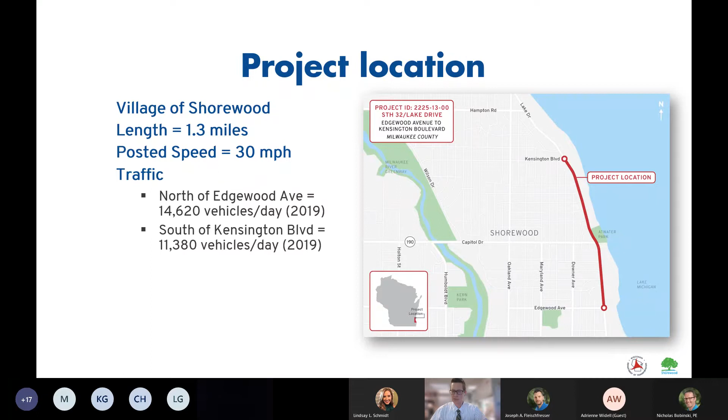Looking at the project, it's located on Lake Drive in the village of Shorewood. The limits are Edgewood Avenue on the south end, and that extends north to Kensington Boulevard for approximately 1.3 miles. The posted speed limit is 30 miles an hour, and traffic in the corridor north of Edgewood is approximately 14,600 vehicles a day, and south of Kensington, it's just over 11,000 vehicles a day.

The purpose and need for the project is to address failing pavement condition. The original pavement was installed in 1952, as well as upgrading existing municipal underground facilities. At this stage, we also need to consider bike and pedestrian accommodations.

So the proposed improvements include pavement construction. This means we are removing the existing pavement as well as the base below it, replacing curb and gutter, and improving curb ramps - this is where the sidewalk meets the curb and gutter at side road intersections. We need to make sure that's ADA compliant, and we'll be replacing combined sewer and water main in the project corridor for the village of Shorewood.

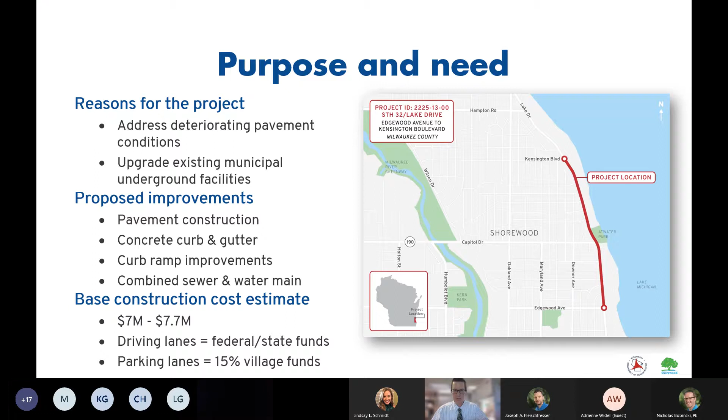Looking at the base construction cost estimate, this would be for replacing the project within its current footprint and not expanding the roadway. The base construction cost estimate is a range of $7 million to $7.7 million. Of that, the driving lanes are funded by federal and state funds, 80% federal funds and 20% state funds. And the parking lanes, though, the cost share for that would be 80% federal funds, 5% state funds, and 15% Village of Shorewood funds. So there's only one alternative that affects the village's cost share, and I'll point that out when we discuss the alternatives and the options in more detail.

Before we look at the proposed alternatives, this corridor is State Highway 32. So there are standards that apply for bicycle and pedestrian accommodations, as well as driving lane and parking lane widths. We will be following the Wisconsin Department of Transportation's Facilities Development Manual, which has desirable and minimum standards for roadways, and you'll see alternatives developed for both.

We are required to show bicycle accommodations. Some of these alternatives do affect on-street parking and existing terrace trees, which are located in the green space between the back of curb and the front of sidewalk.

Although there is a risk to these existing trees with all construction alternatives, the village arborist believes that widening the roadway will have a significant negative impact on these existing terrace trees because their roots likely extend to the back curb. On other Village of Shorewood projects where curbs have been moved out, the arborist has seen that some trees decline quickly, while others may slowly decline over a period of 5 to 10 years.

As a designer, we may deviate from the desirable standards with strong public input, as well as consideration to impacts such as trees, parking, and parkland. We have Atwater Park located in the project, and historic districts—there are 2 residential historic districts within the project limits. So in summary, we need to balance the federal and state standards with the needs of the local community and residents. And like Lindsay said, we're here to get your input.

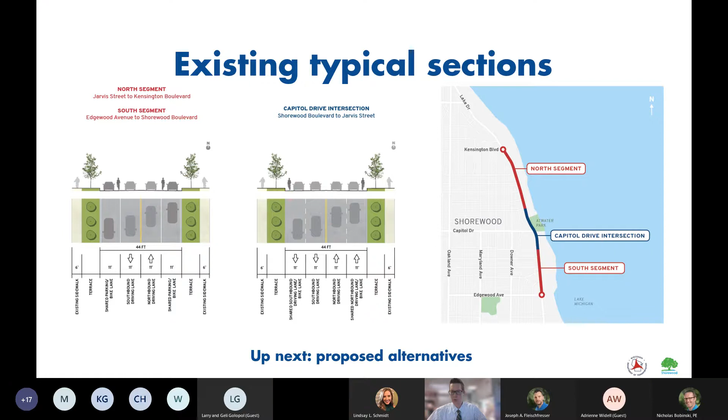We'll begin with the north and south segments. The south segment goes from Edgewood Avenue up to Shorewood Boulevard, and the north segment from Jarvis Street up to Kensington Boulevard. There are 3 alternatives for these segments.

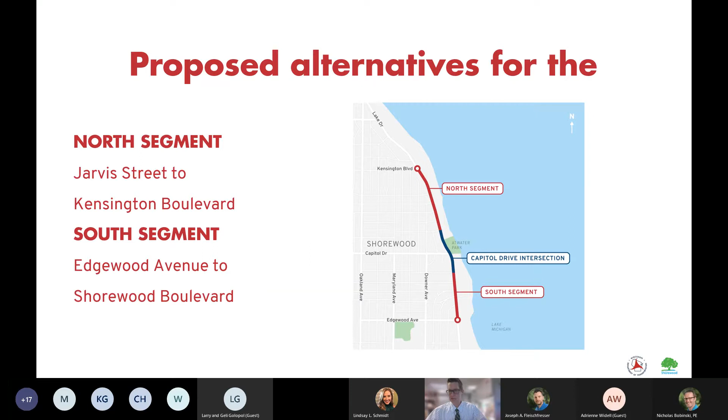The first alternative I want to discuss is called the 5-foot bike lane. This alternative measures 44 feet from face of curb to face of curb, just like the existing roadway. There would be one 11-foot driving lane going northbound and one 11-foot driving lane going southbound. In addition to a 2-foot gutter, there would be a 5-foot dedicated bike lane in each direction, southbound as well as northbound. Under this alternative, there's an 8-foot parking lane.

The alternative on the screen shows the parking lane on the east side of the roadway, because Atwater Park is located on the east side. This could possibly reduce mid-block crossings of people trying to get to Atwater Park. The other benefit is that with parking restrictions in the PM hours, when northbound vehicles are trying to make a left turn onto the side roads, through vehicles could pass those turning vehicles using the parking lane during those restrictions.

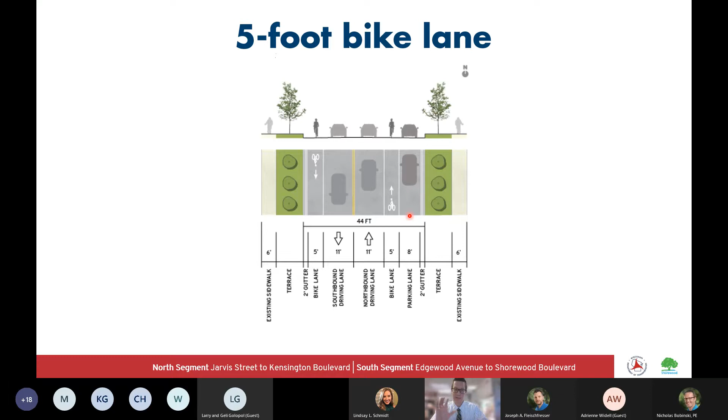That said, the parking lane could also be placed on the west side of the roadway instead of the east side, which would just rotate this alternative 180 degrees.

For the specifics of the 5-foot bike lane alternative: the road width is 44 feet from face of curb to face of curb. There is no widening with this alternative, however there is only one side of parking. There are dedicated 5-foot bike lanes in each direction. This is considered a desirable bike accommodation per WisDOT.

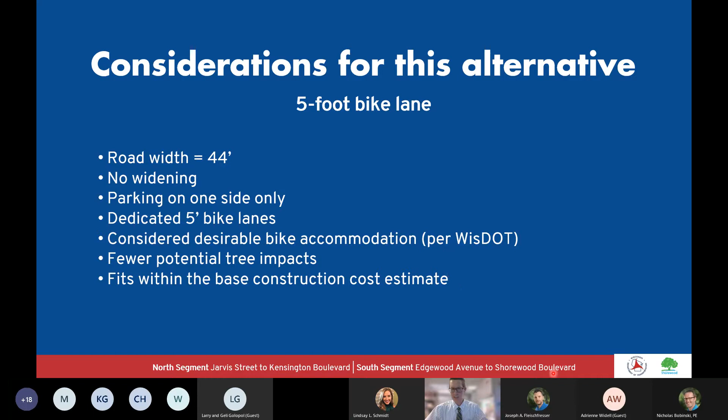Looking back at the standards we started with, this is considered desirable. Since we're not widening, there would be fewer potential tree impacts, and this fits within the base construction cost estimate I mentioned earlier of $7 to $7.7 million. So this is the 5-foot bike lane alternative for the north and south segments.

Moving on to the 12-foot shared parking bike lane alternative. This typical section measures 46 feet from face of curb to face of curb, with one 11-foot driving lane going northbound and one 11-foot driving lane going southbound. In this scenario, the outside lane is widened 1 foot, becoming 12 feet for a shared parking and bike lane on both sides of the roadway.

Looking at the considerations of the 12-foot shared parking bike lane alternative, the road width is 46 feet. This is widening of about 1 foot on each side of the roadway. It does allow parking to remain on the east and west sides of the roadway. Bikes would share a 12-foot parking lane. This is considered the minimum for parking and bikes in a constrained environment.

This is when we have parks such as Atwater Park as well as historic resources in the corridor. However, with the widening of 1 foot on each side, there would be potential greater impacts to those existing trees. And with the widening of the parking lane, the added cost for that would be approximately $130,000 to $190,000 in addition to the base construction cost estimate. Because this widening is happening in the parking lane, this is the one alternative that affects the village's cost share and would increase their participation in 15% of these costs. So this is the 12-foot shared parking bike lane alternative.

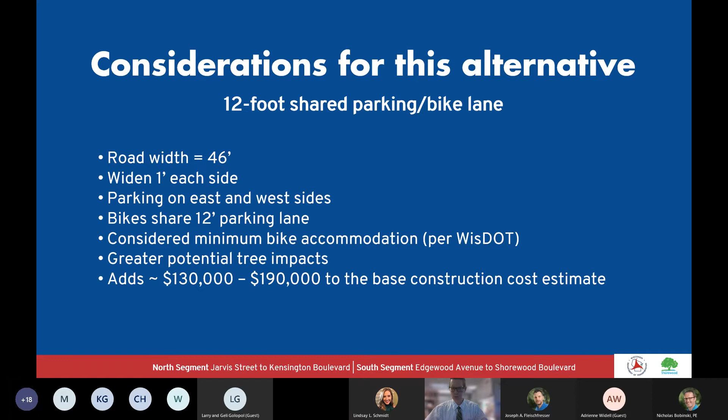Moving on to the replace in kind alternative, this is if we just pull out the pavement and put it back exactly the way it is. This measures 44 feet from face of curb to face of curb. There's one 11-foot driving lane going northbound, one 11-foot driving lane going southbound. The outside lanes are 11 feet wide, and that's for parking and bike use as it is today.

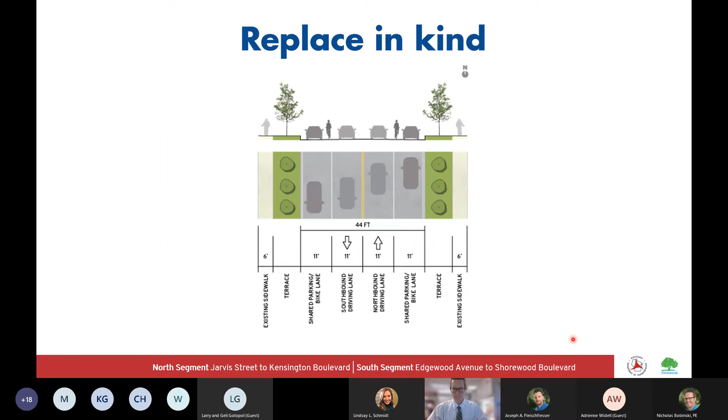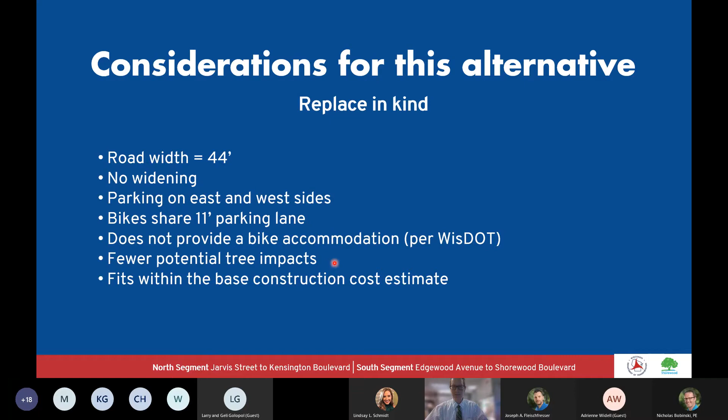Looking at the specifics of the replace in kind alternative, 44 feet from face of curb to face of curb. No widening, parking would be on the east and west sides. Bikes do share the 11-foot parking lane. This does not provide a bike accommodation per WisDOT. However, there would be fewer potential tree impacts because we're not widening, and this does fit within the base construction cost estimate that we mentioned earlier.

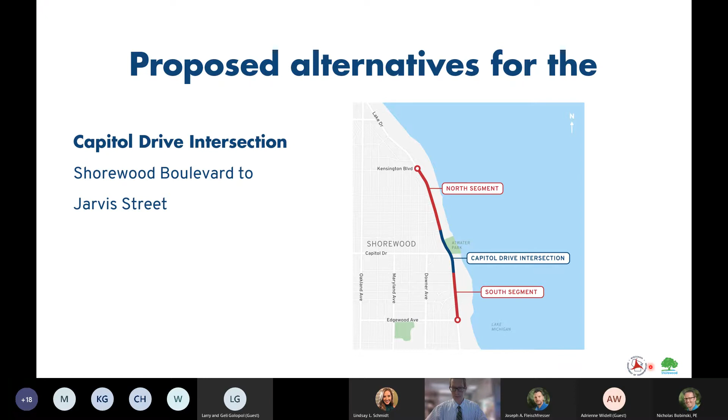Moving on to the Capitol Drive intersection and those alternatives, from Shorewood Boulevard to approximately Jarvis Street. We have 4 alternatives for this segment of the roadway. We'll start with a 5-foot bike lane alternative. This section measures 58 feet from face of curb to face of curb. There would be 2 11-foot driving lanes going northbound and 2 11-foot driving lanes going southbound. The outside lanes would have a 2-foot gutter and a dedicated 5-foot bike lane for southbound as well as northbound.

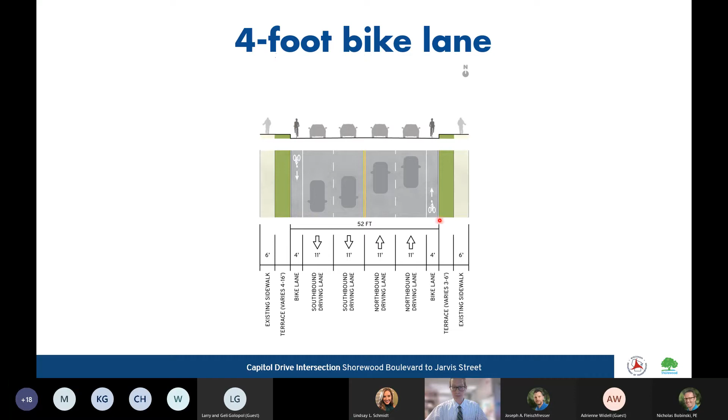Looking at the specifics of the 4-foot bike lane at Capitol, road width would be 52 feet. That's widening of about 4 feet on each side of the roadway. The width of the outside driving lane is 11 feet, which meets standards. It has dedicated 4-foot bike lanes, which is considered a bike accommodation per WisDOT. However, there's going to be impacts to trees as well as traffic signals, and this adds approximately $290,000 to $350,000 to the base construction cost estimate. Again, these are estimated numbers for comparison.

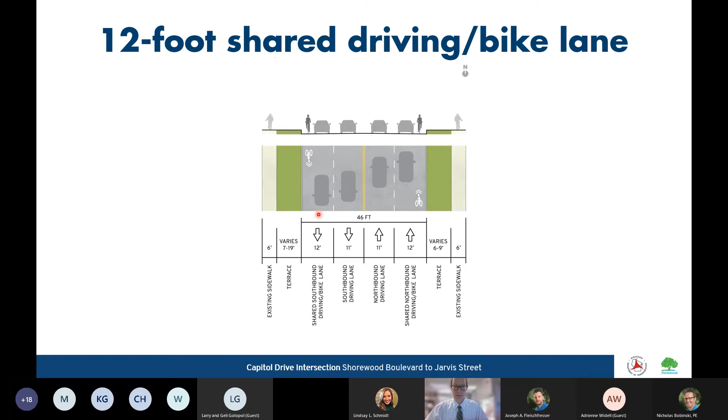Next alternative would be the 12-foot shared driving bike lane alternative. This is at Capitol Drive, measuring 46 feet from face of curb to face of curb. There's one 11-foot driving lane going northbound and one 11-foot driving lane going southbound. There's also a 12-foot shared lane for bikes and vehicles going northbound, and similarly a shared 12-foot driving bike lane going southbound.

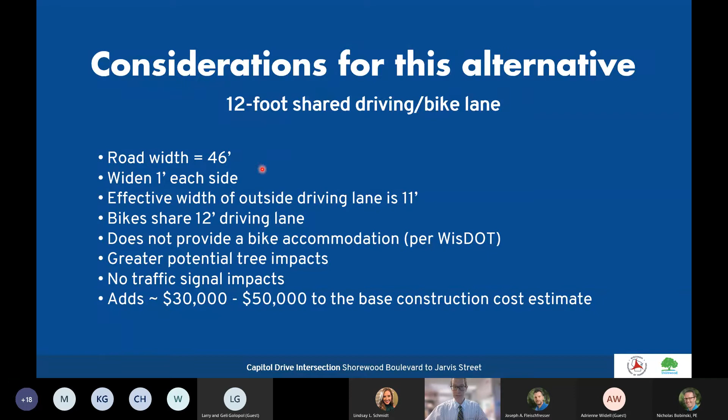Looking at the specifics of the 12-foot shared driving bike lane alternative, the road width is 46 feet, about 1 foot of widening on each side. The effective width of the outside driving lane is 11 feet. WisDOT has seen that when the curb is right there on the lane, vehicles tend to stay at least 1 foot off of it, effectively reducing that outside driving lane width to 11 feet, which still meets the standards for the driving lane.

So bikes do share this 12-foot area, however it does not provide a bike accommodation per WisDOT. With the widening, there are greater potential tree impacts; however, there would be no traffic signal impacts. This would add about $30,000 to $50,000 to the base construction cost estimate. Again, this is the 12-foot shared driving bike lane at the Capitol Drive intersection.

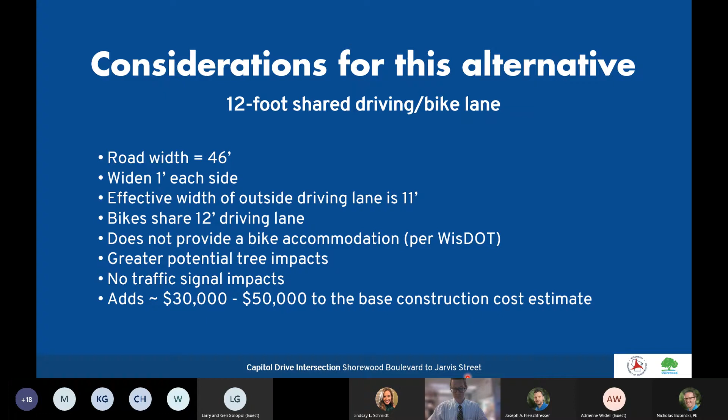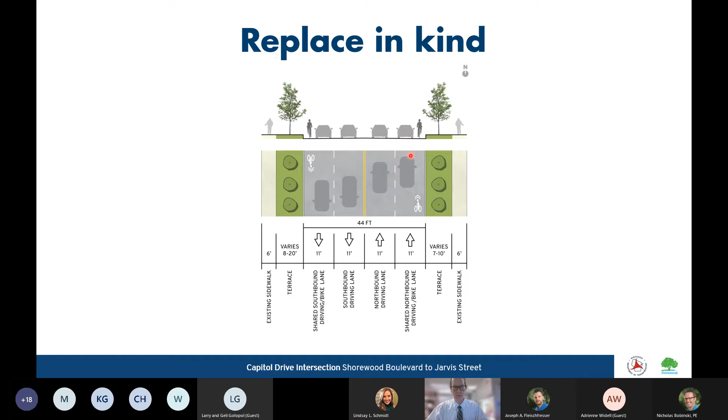Finally, we have the replace in kind alternative — if we take out what's there and put it back exactly the way it is. This measures 44 feet from face of curb to face of curb, with one 11-foot driving lane going northbound and one 11-foot driving lane going southbound. Just like today, there's an 11-foot shared lane on the outside that bicycles need to share with traffic, one lane northbound and the same thing southbound.

Looking at the specifics of this alternative, the replace in kind at Capitol: road width is 44 feet, with no widening. However, the effective width of the outside driving lane would only be 10 feet, which does not meet the WisDOT standard. Bikes would be sharing an 11-foot driving lane, which does not provide a bike accommodation. It fits within the existing footprint, so there would be fewer potential tree impacts, no traffic signal impacts, and it fits within the base construction cost estimate we discussed earlier.

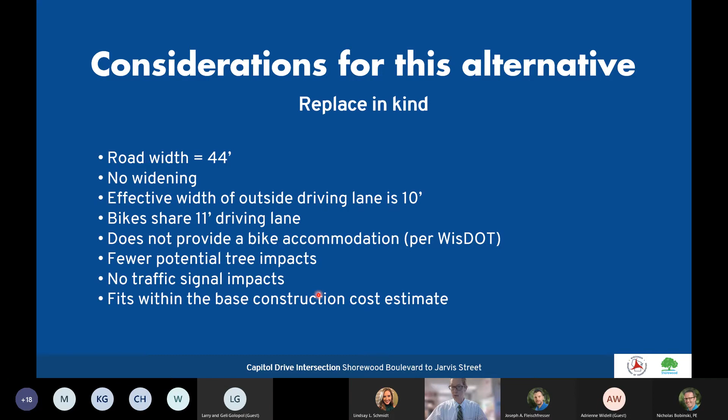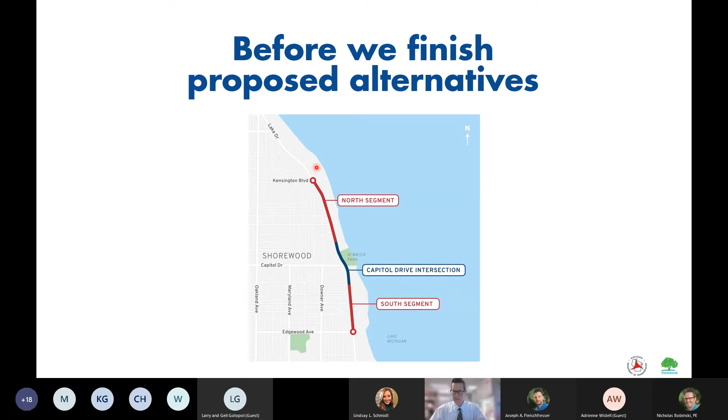Before finishing, I want you to know we can mix and match these alternatives. For example, if it's determined that the appropriate alternative for the south segment is the 5-foot bike lane, that doesn't mean it's an appropriate alternative for the Capitol Drive segment or the north segment. So these alternatives can be combined or blended to complete the full corridor. We'll also be coordinating with the City of Milwaukee on the south end of the project and the Village of Whitefish Bay on the north end to transition our pavement marking with projects in the neighboring communities.

Most of the existing sidewalk will remain in place. However, there will be some minor sidewalk replacements at curb ramps — locations where the sidewalk meets the existing curb and gutter at intersections. These curb ramps would be replaced to make sure they're ADA compliant.

With the sewer and water work, there may need to be connections to laterals to the individual properties. If that's the case, there may need to be some spot locations where sidewalk would be replaced for the lateral work. And with the widening alternatives, there could be some sidewalk that needs to be replaced. In this case, we're showing that at Atwater Park, where the roadway is expanded really close to the existing sidewalk.

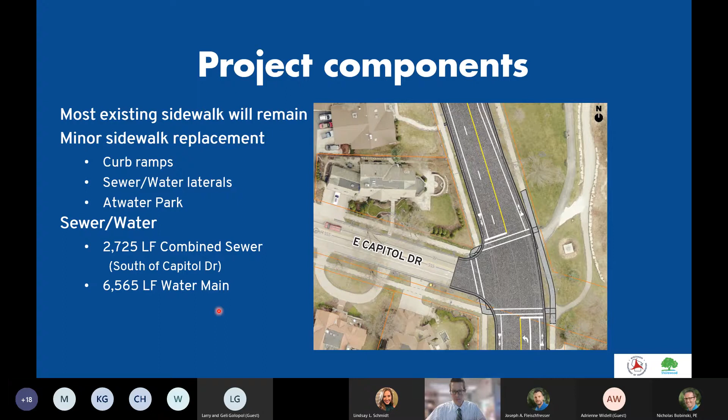As far as the sewer and water goes, there's about 2,700 lineal feet of combined sewer that would be installed south of Capitol Drive, and 6,600 feet of water main throughout the project corridor that will be replaced.

In addition, the village will replace the lighting. Whether the street lighting is impacted by widening or not, the village would like to install new wire in conduit, new poles with LED luminaires to be more efficient.

As far as right-of-way goes, there's no relocations on the project. However, there could be some small strip takings or grading easements required for the sidewalk and curb ramp work that we just discussed on the previous slide.

Other considerations that the village would like the project team to look at would be curb bump outs at intersections to shorten crossing distances for pedestrians, which also serve as a traffic calming option. And then ADA on-street parking, likely near Atwater Park. These will be options that the project team will review as the design progresses.

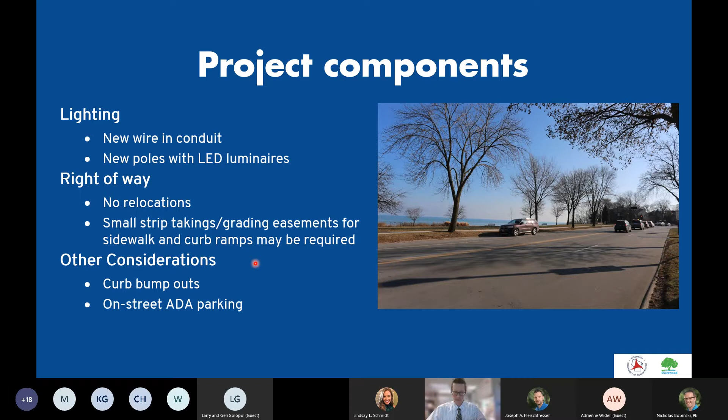We'll upload a recording of this meeting presentation, both the 5 o'clock and 6 o'clock versions, which will be the same. We'll also post a PDF of this PowerPoint, a PDF of the typical sections for the north, south, and Capitol Drive segments, and a PDF showing the different plan view layouts. This will allow residents to find their property and zoom in to see the various layouts, like flying a helicopter over and looking down on the corridor. That'll be very helpful.

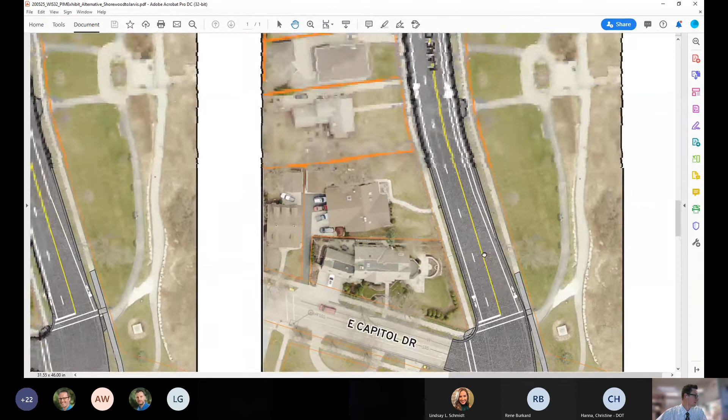Okay, so this is Shorewood to Jarvis. So if we look at the 5-foot bike lane, for example, and zoom in here, that second northbound lane does end just north of the intersection like it is today.

So there is one lane there and two lanes southbound. So this would mean there is no more parking, this would be a dedicated bike lane. Well, this is one of the alternatives, so that's why we shared the link to the website which has these alternatives. The one we just looked at was the 5-foot bike lane, and then there are other alternatives that do allow parking there.

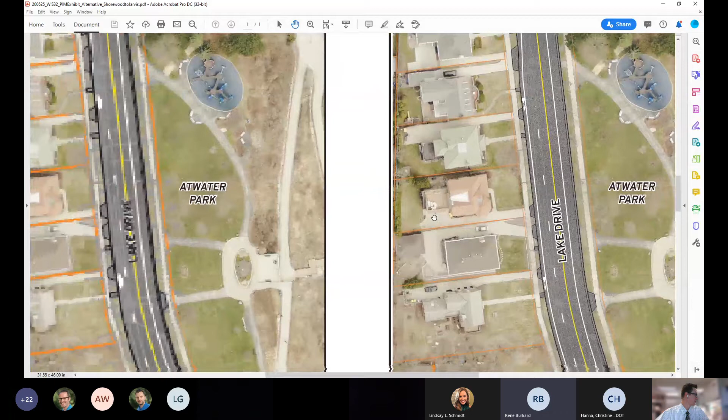Aaron, can I suggest we schedule a call with Renee, or a visit to his property, just so we can give everyone else an opportunity. We have, I think, 5 or 6 other hands up, just for the sake of time.

Yeah, that would be a nice thing, because my neighbors and I inquired for years to do something about the parking situation, because we can't get out of our driveways. There is a lot of parking, and driveways are getting blocked by cars coming from outside. It is a known danger that the village of Shorewood should know. If somebody is getting hit in this area trying to leave their driveway, this is very, very dangerous. That is a known danger.

So Renee, if you can send an email to Aaron, myself, and Lindsay, whoever else you want to copy, with your name and full address, we'll try to schedule a time to meet with you and discuss your concerns further. That will be great. Okay, who should I send the email to again? You can send it to Aaron or myself.

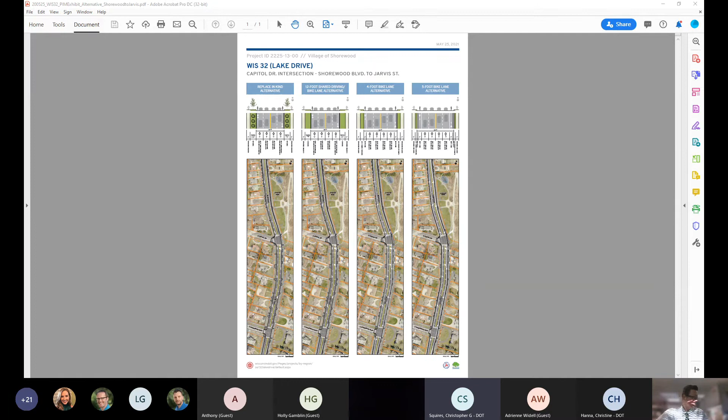There are some alternatives that were presented that can accommodate bikes without widening. So I guess I would encourage everyone, when you submit your comments about what your preferred alternative is, to be as specific as you can as to why you prefer an alternative or what impacts your concerns. For example, if one alternative has parking on one side as opposed to both, if you can provide comments on why you prefer one alternative or replace in kind over the other, I think the more detail the better when it comes to that.

It would help Christine's team. Chris, sorry to interrupt you, but what I've heard from a lot of people, including the village, is that they want the replace in kind. It sounds like you guys are not even considering that, the feedback you're receiving so far.

I believe that was one of the alternatives presented. I'll leave it to Aaron and Christine to address that. Anthony, I believe you're the one asking the question. We are considering that, we're not eliminating it, but we are going through the environmental process by sharing with the public all possible alternatives.